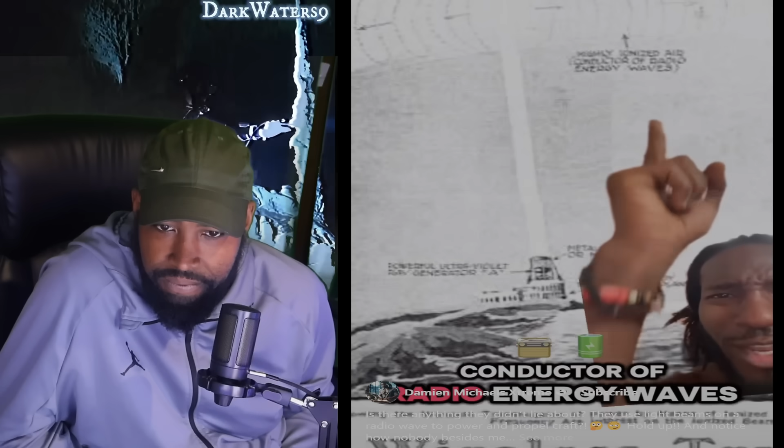It is a well-known fact, ionized gas is a conductor. Look at the airship. Look at this building right here. Ultraviolet, powerful metal screen, wireless energy transmitting, shooting a beam straight up, conductor of radio energy waves, doing like some weird little wavy thing in the pattern. That's how we get that wave pattern in our clouds.

Let's just keep looking, keep analyzing this. Man, I was wondering how we got those wave patterns. I thought it was HAARP or something. Pattern in clouds. You know, it shouldn't be like that.

We're gonna get to that airship in a second. Aircraft propelled by wireless power. Look, ultraviolet beam. Look, ultraviolet beam. Look, anchoring it to Earth. It gives it power and it anchors it. Look at this right here.

Stationary for radio power, isolated land. It's like this is getting power from the ether, but it's free and it's wireless power. The ship.

So it's like they're getting the energy from the ether at these buildings, and then they're able to transmit that, is what I'm getting here. It's not soaring in the ether. Oh, that's an interesting theory. Propulsion, radio powerful. The ship is using the same beam that the airship is using to power itself.

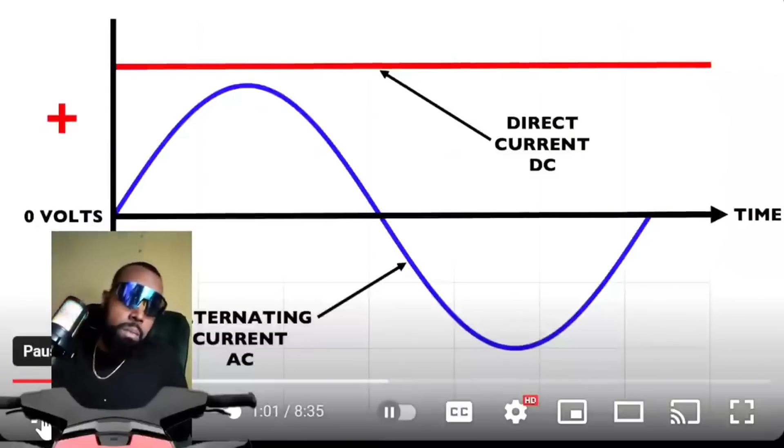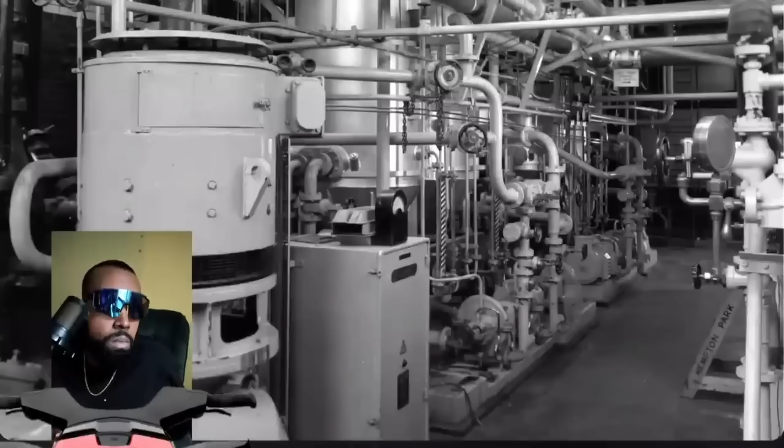That might be DC, it might be AC, it could be high voltage or medium voltage, and if it was AC, it could be at any frequency that the machinery they used generated. On this site, it was convenient to generate DC voltage because what they wanted it for was to power motors and lights, and DC at that time was much easier when it came to motors. And so they chose to generate 200 volts DC.

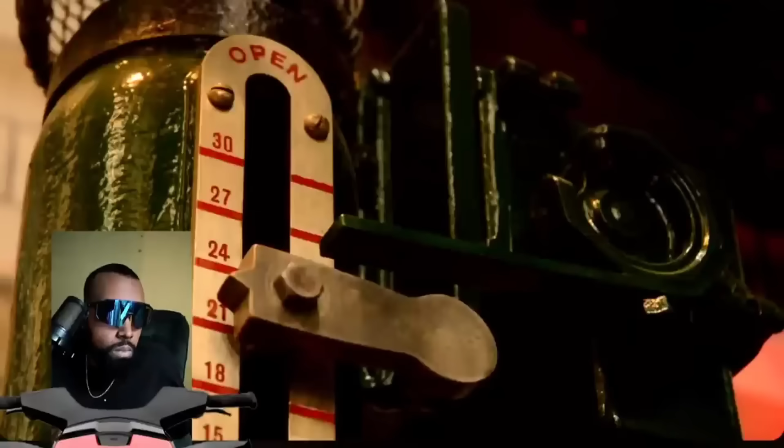When the national grid was installed in the early 1930s, this was AC voltage at around 415 volts, 3-phase, 240 volts single phase. Faced with the choice of either replacing all the machinery or changing the AC to DC, that was the simplest option. And the technology of the day was the mercury arc rectifier.

Rectifiers work because they will only pass current in one direction. AC reverses current continually.

This is those things we kept seeing here. I'm gonna put them over there. That mercury arc rectifier, this is what we've been seeing, but different versions of it.

In our case in the UK, 50 times a second. If you apply an AC voltage to a rectifier, it will cut out the reversed half of the cycle.

I believe people are finding these all over, like those boys we seen that ran across that dusty one. They're hidden underground, you know, under the cities. They're saying some of them are still underground under the mud flood, or however they're getting underground or in abandoned places. People are finding them, still working.

So you get current that flows only in one direction. That is a form of DC.

Mercury arc rectifiers were invented by a man called Peter Cooper Hewitt. He was the inventor of the mercury discharge lamp. He was trying to produce a light that was brighter than the currently available incandescent lamps, and he patented that in 1901, but realized that if you put AC across a mercury vapor lamp, it rectified into a form of DC. And from that he developed the mercury arc rectifier.

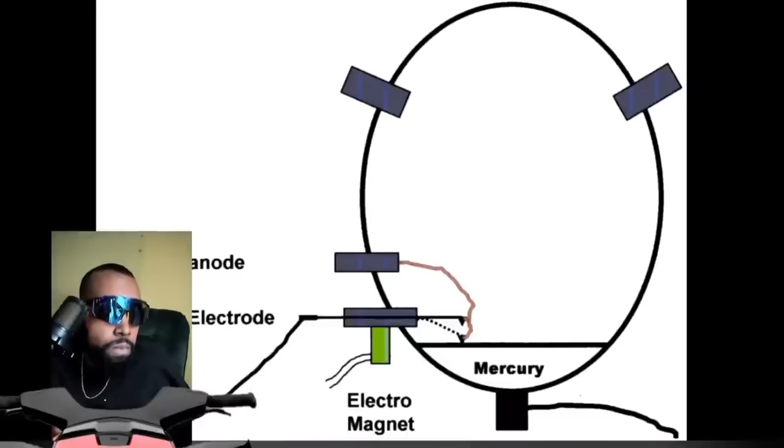That shorts the electromagnet out, which releases the wire and creates a spark, which is then picked up by two small anodes at the back to keep the arc flowing. What happens is when the spark is created, it ionizes the mercury vapor and makes it conductive.

When we apply 6 phases around the main anodes and connect a load, the arc is picked up by each of the anodes, and whichever anode is positive at that one time, that's the anode that conducts. So in fact the arc is passed around between the anodes successively, round and around and around.

Of course this happens at a very rapid rate, so you can't actually see it rotating, but what you will see is where the arc touches the mercury at the bottom, creating a very bright spark, and because the arc is moving around, this spark darts about. We have a transformer in the basement which converts, because the arc is...

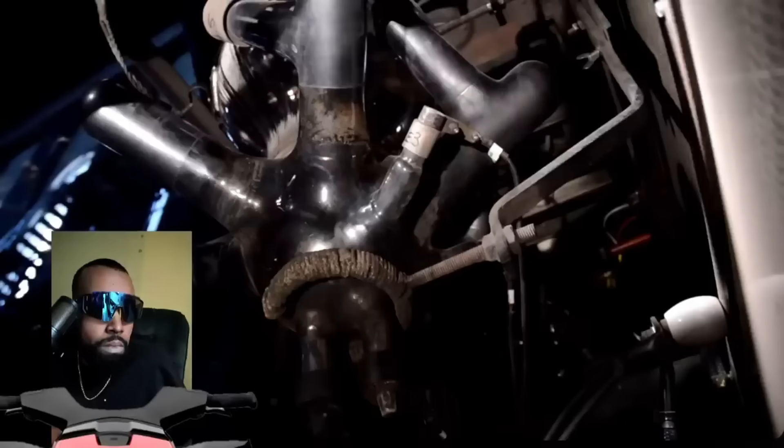The arc will be struck and picked up, and you'll see it operating. At the same time, the cooling fans at the bottom of the cabinet will also start. So I'll now move over to the end of the cabinet and press the start button. And the starting sequence is going through, and immediately the rectifiers start.

Now you'll see that because the electricity is flowing through the mercury vapor, it glows this characteristic blue-green color.

The more current we pull through the arc, the brighter it becomes, and we can demonstrate that in just a moment. But to do so, I need to connect the rectifiers. These 2 rectifiers work in parallel to the main DC switchboard, and we do this with the switch at the top here.

That's now connected these rectifiers to that switchboard, and you can see we're generating a voltage there. I shall now switch the...

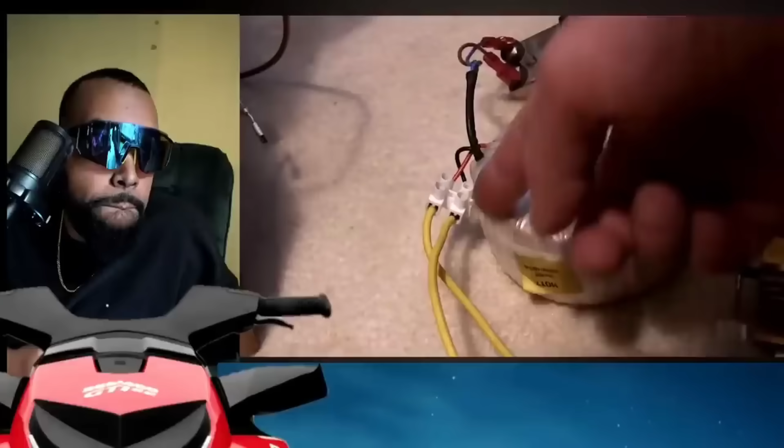So that's what gets a few mercury atoms flying around, and once that happens, obviously now we'll start conducting on these anodes back to the transformer. So to start it, it's quite straightforward. 240 volts, 38 volts, something like that, into a rectifier, through these resistors, through this choke, which gives a nice kickback, and that's all what runs it.

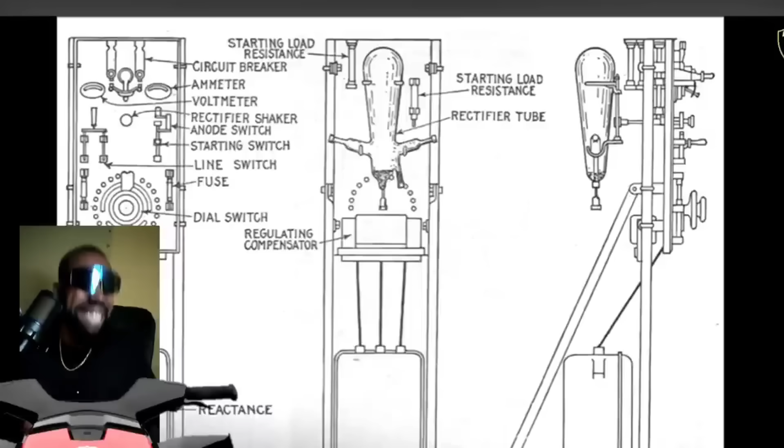A mercury arc valve or mercury vapor rectifier is a type of electrical rectifier used for converting high voltage or high current alternating current AC into direct current DC.

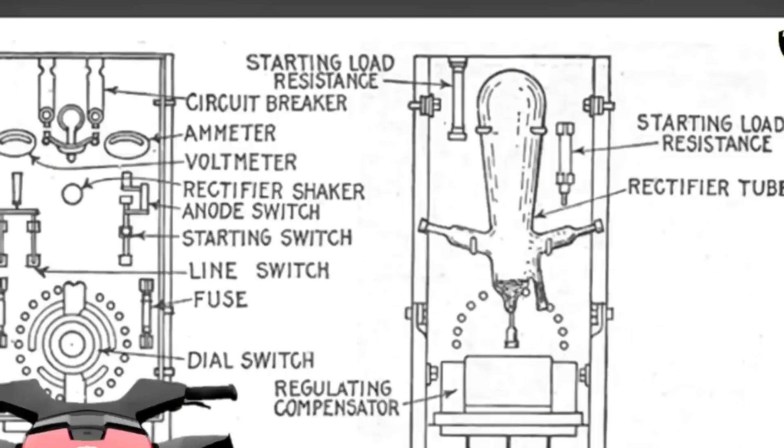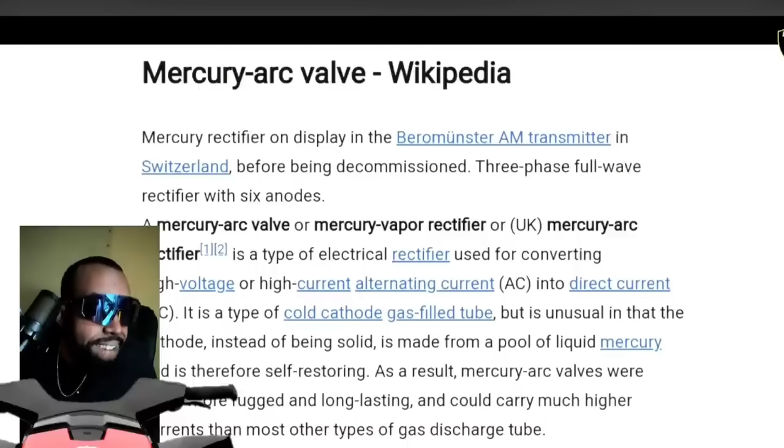It is a type of cold cathode gas filled tube, but is unusual in that the cathode, instead of being solid, is made from a pool of liquid mercury and is therefore self-restoring. As a result, mercury arc valves were much more rugged and long-lasting and could carry much higher currents than most other types of gas discharge tubes.

See, this is where it gets a bit booky. Invented in 1902 by Peter Cooper Hewitt, mercury arc rectifiers were used to provide power for industrial motors, electrical railways, streetcars and electric locomotives, as well as radios, transmitters and high voltage direct current.

Now the problem for me is, if they were invented in 1902, how were all these other things powered? How were these electric cars being charged up? How was the London Underground and the mail rail in the 1880s converting the power? If they had to use direct current and the only power station was generating alternating current, how were they doing that? I think that's a mix-up there, and I've caught them out lying.

But how do these work then? The operation of the rectifier relies on an electrical arc discharge between the electrodes in a sealed envelope containing mercury vapor at a very low pressure. A pool of liquid mercury acts as a self-renewing cathode that does not deteriorate with time. The mercury emits electrons freely, whereas the carbon anodes emit very few electrons even when heated.

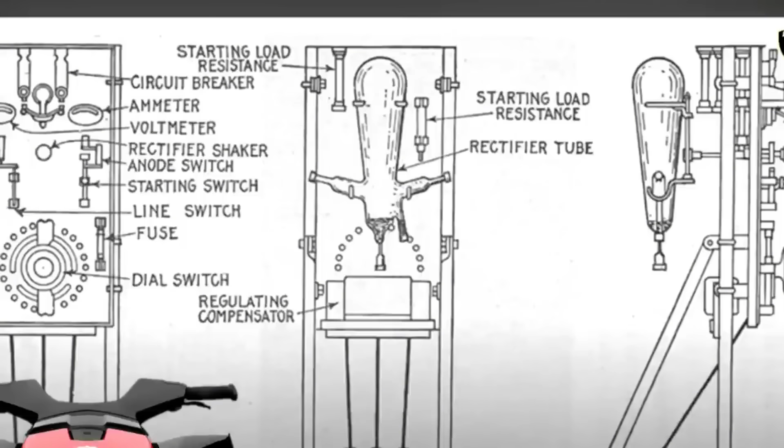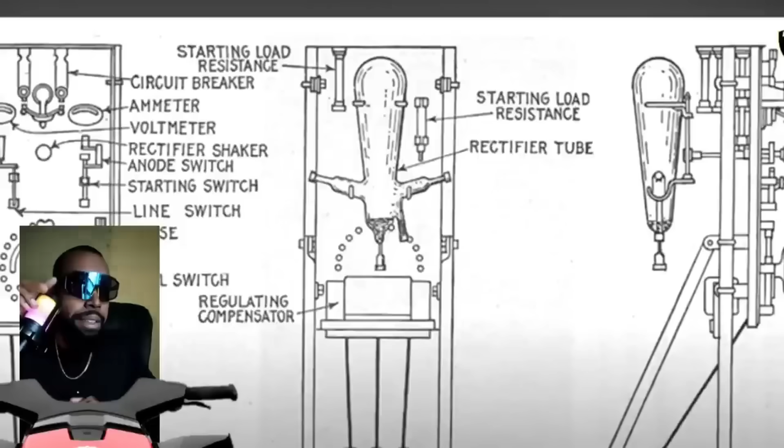If he's saying that's how the electrons are getting emitted freely, maybe that's how they're able to use these rectifiers to get these faces in there. I'm seeing how their vehicles are kind of moving now, but that's still not explaining how we're seeing these faces pop up in these rectifiers. We're getting close though, I feel it.

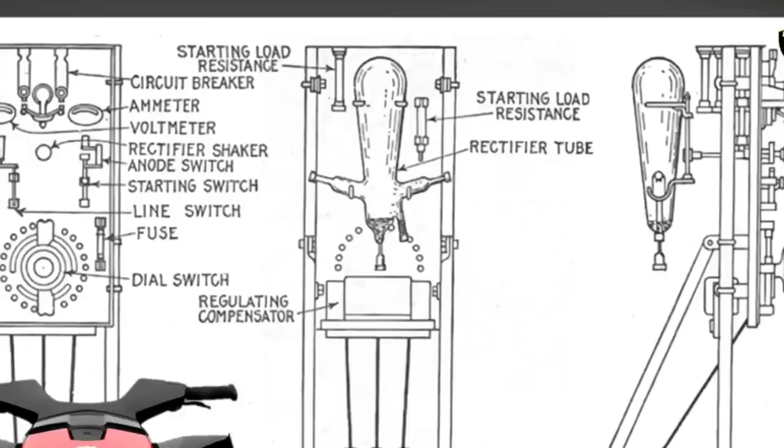The current of electrons can pass through the tube in one direction from the cathode to the anode, which allows the tube to rectify alternating current. When an arc is formed, electrons are emitted from the surface of the pool, causing ionization of mercury vapor along the path towards the anodes. The mercury ions are attracted towards the cathode, and the resulting ions bombard the pool, maintaining the temperature of the emission spot.

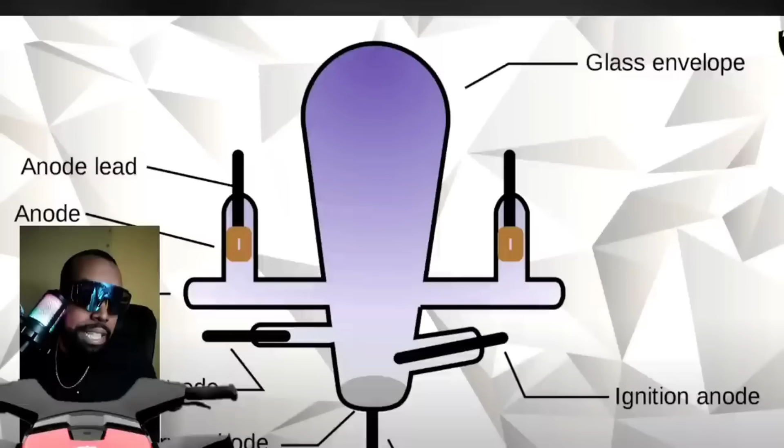Vapor, that's the secret, mercury vapor, y'all. So long as the current of a few amperes continues.

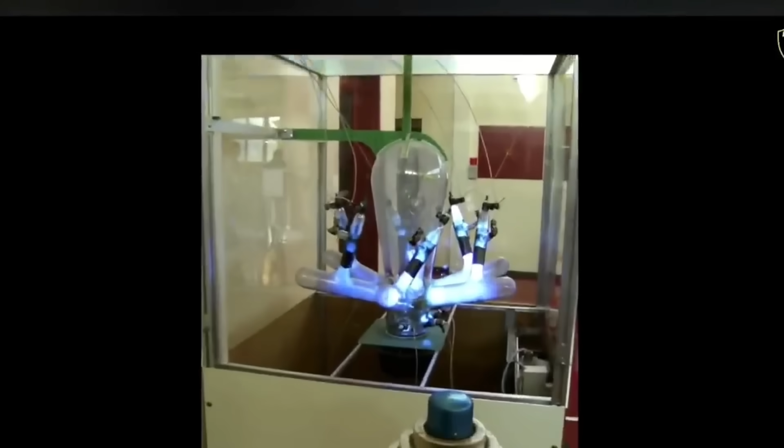So there you go. Early 1900s, 120 years ago, they were using mercury to rectify, to convert AC to DC. Now, what else were they using mercury for back then?

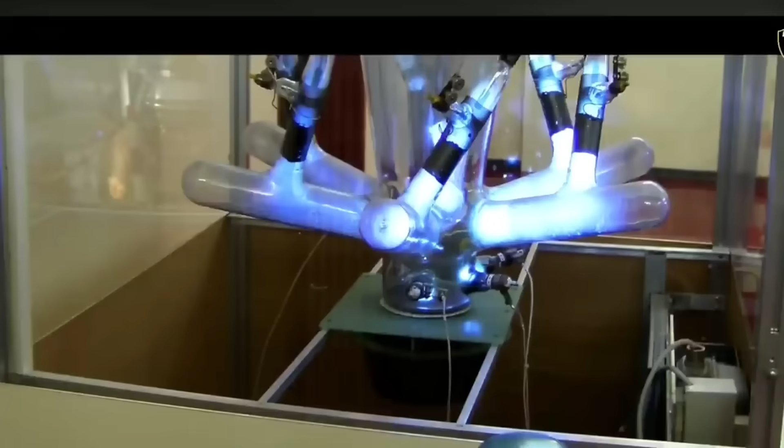I mean, look at this device. Look at it, this looks like some real old world tech. And don't get me wrong, well, do get me wrong, I don't believe these were invented when they said. I reckon they were around a lot earlier than that. I believe mercury has a massive part in free energy, and that's why we don't hear of mercury. That's why we're told it's so dangerous and poisonous, don't go near it, all that jazz. But it's like anything, do a bit of research and use common sense, you'll be alright.

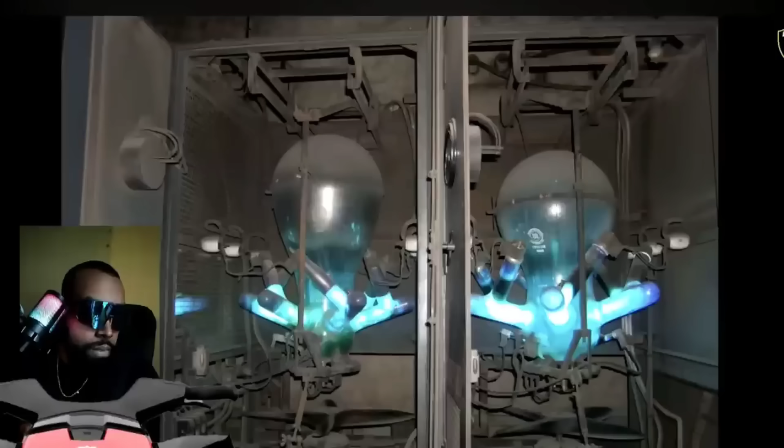But look at it, look, absolutely beautiful there. Now, like I said, I actually found two of these in Malta in an old theatre.

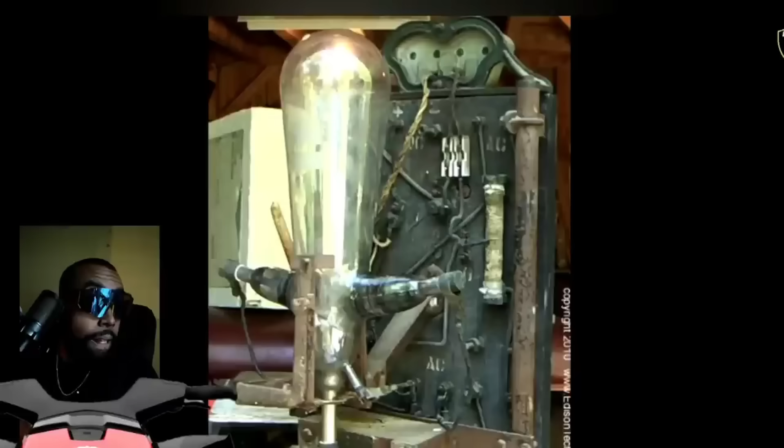It used to be an old theatre, then it converted into a disco. But then the disco shut down, and they left the top floor alone. On the top floor was the cinema, and they had all the electrical stuff up there, stuff like this. They had the mercury arc rectifiers. They even had reels from the 1950s, and I'm going to show you all that in a minute. But have a look at these, these are the mercury arc rectifiers.

They're everywhere. And man, that story of Frankenstein is making a little bit more sense, ain't it? What if he was using a mercury rectifier on some evil doer stuff on a real person? Man, that would be scary, trying to use a mercury rectifier on someone that's expired.

I can see them everywhere now. I've been looking at these pictures for almost two years and never noticed. It's funny how you progress and learn as you get wiser.

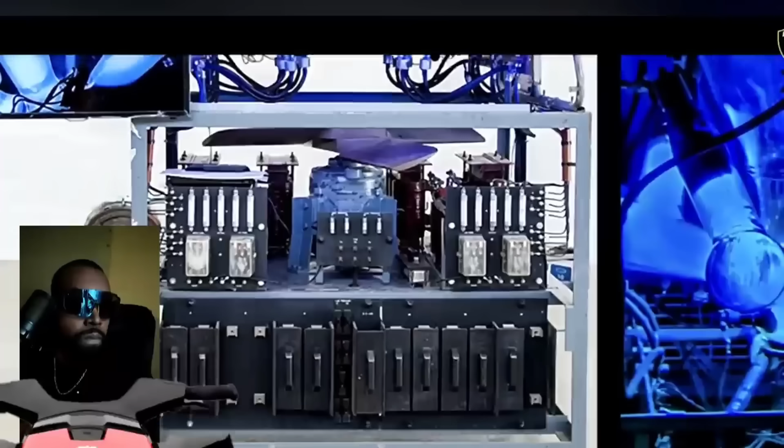Now I was actually going to go to the mail rail this week to do a tour, and apparently they've got a working Mercury arc rectifier there. So I'll be going there probably in the next couple of weeks.

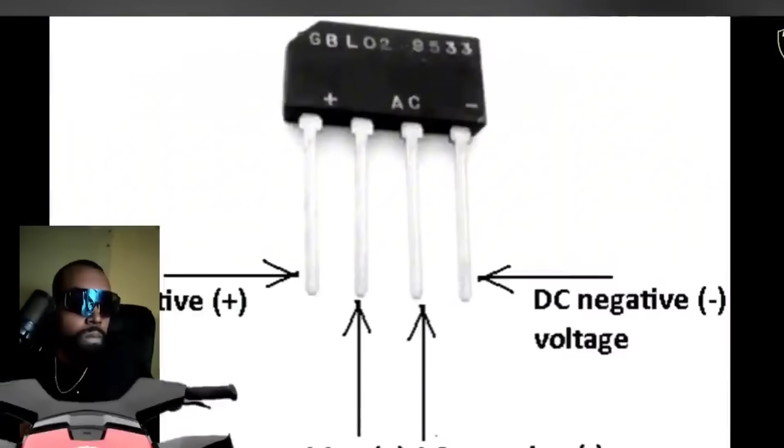So this is what they used before, but now what they brought out is these rectifiers. The Mercury arc rectifiers got replaced in the 70s, and they replaced them with these little gadgets. These are rectifiers - you've got the AC currents going in the centre, and the direct currents coming out on the outside ones. So it's sort of like a little transformer as well.

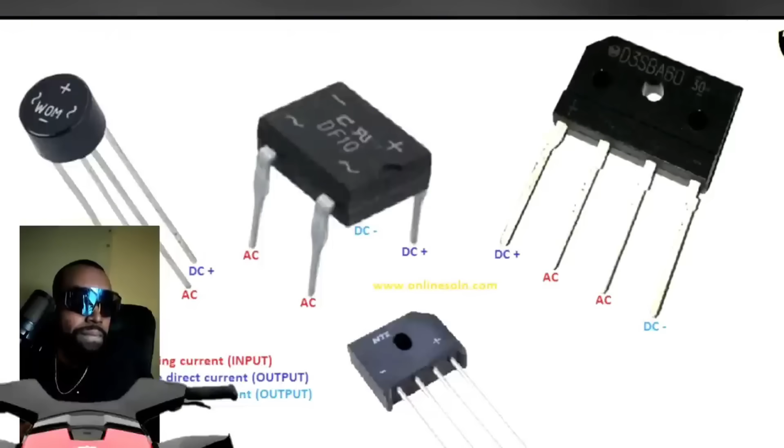Now what I want to know is what happened to all that mercury. Like I said, I got 770 grams exactly out of one Mercury arc rectifier. There must have been millions - how many people had electric cars in the early 1900s? So many people, millions of people. So there'd have been millions of Mercury arc rectifiers, plus the ones used on the tubes, plus the ones used on the mail rail. Where has all this mercury gone?

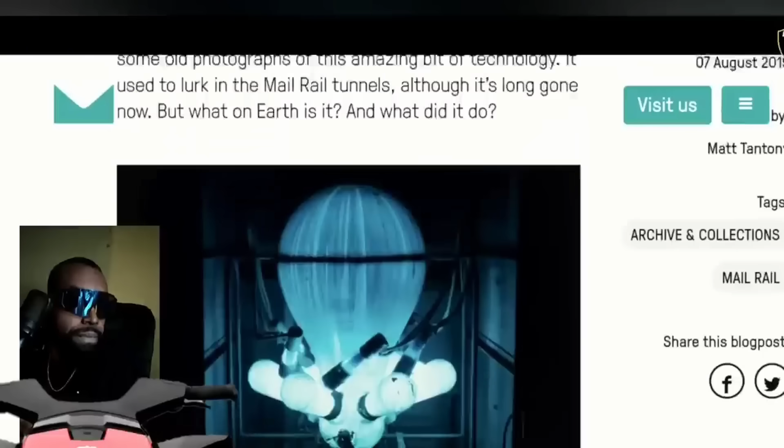Let's have a look - I was exploring an archive today, let's see what it says.

It's called a Mercury arc rectifier. It's a large glass bulb, and at the bottom is a puddle of liquid mercury, and it really does glow bright blue when switched on. There were several Mercury arc rectifiers in the mail rail, and they played a vital role powering the railway from 1959 to the 1980s.

And again, I believe they're playing with dates, because when did the mail rail actually come out? That came out years ago. So what power was it using before the Mercury arc rectifiers came along? It was using alternating current - but how did it convert it? It's just a load of cobblers. History is a lie, it's a complete lie.